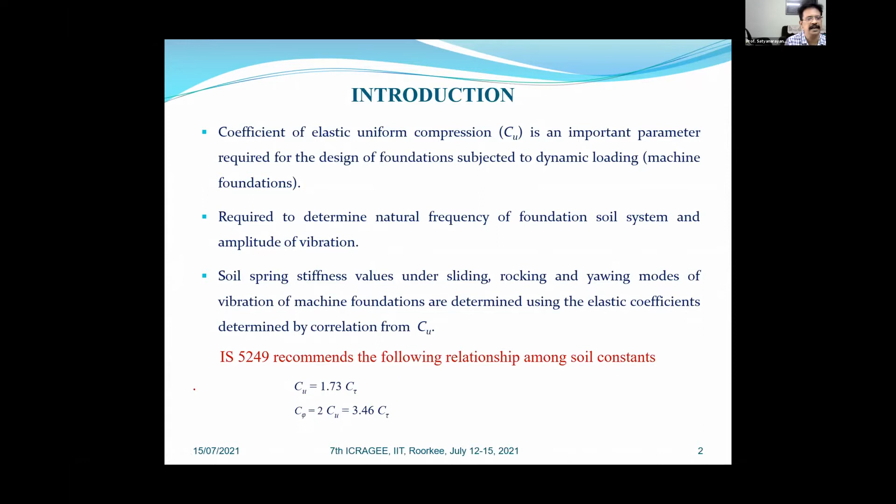So all these other three elastic coefficients are generally estimated by correlation from CU. For that, even our IS code 5249 gives a relationship. Once you know the value of CU, you can estimate the others, and from there you can find out the soil spring stiffness, and analyze the natural frequency of a foundation soil system for that particular mode,

and go for estimation of amplitudes of vibration. We can carry out design such that the calculated amplitude of vibration is well within the permissible limits. So as we know, coefficient of elastic uniform compression is defined as the ratio of uniform compressive pressure

transmitted from the base of the footing to the elastic settlement. Simply we say it as P by Se, right? This is generally determined either from a cyclic plate load test, or you can also do a block vibration test. But very often people prefer the cyclic plate load test because the equipment is readily available and it is easy to

perform the test, and the test is generally done using square plates. So sometimes in an industrial establishment, all the vibrating bases may not have foundations that are square in shape. There can be circular bases also. So in such a case, what happens is whatever estimate of CU is made based on square plate cyclic load tests,

when they are correlated using Barkan's well-established equation, Cu1 by Cu2 is equal to square root of A2 by A1, such correlation will be useful only for that particular shaped foundation. So in case you are determining CU from a square plate test and using the projected value for a circular based one, it may result in some error in calculation of amplitude of vibration and natural frequencies.

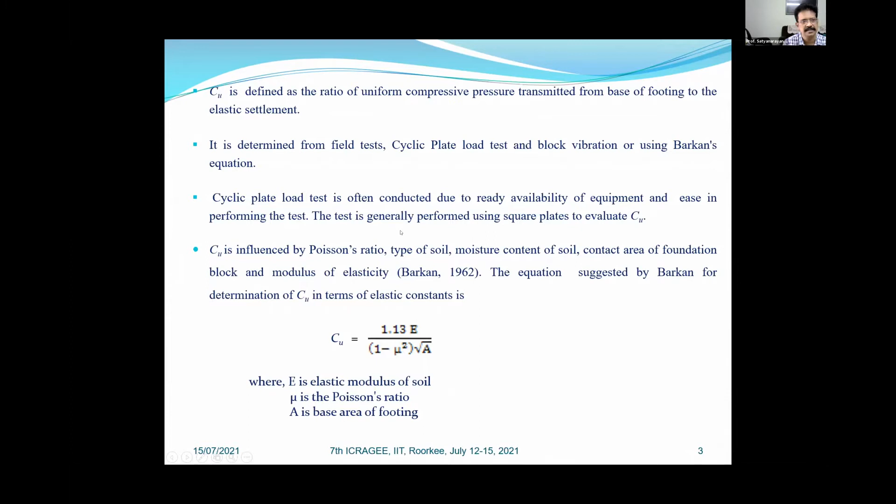needs precise testing in laboratory, and that's why the more common test done is the cyclic plate load test. So as for the value of Cu,

looking at its definition itself, P by Se, under a given pressure, the elastic settlement is definitely influenced by shape of footing because of the pressure bulb. The shape of pressure bulb for square footing and circular footing is different. So for a given pressure, we are not going to have the same elastic settlement in a given soil, and hence Cu is going to be affected.

So there is a need for evaluating a shape factor so that we can switch from values of Cu determined for square test plates or square foundations to circular foundations.

Also, industrial establishments generally take place in the suburbs of cities or metropolitan areas, where you may have low-lying areas, and a lot of filling will be done there. So generally, conventional fill materials are used and compacted in layers, but due to increased demand and scarcity of conventional fill materials, people are planning to use alternate marginal soil, particularly in coastal areas.

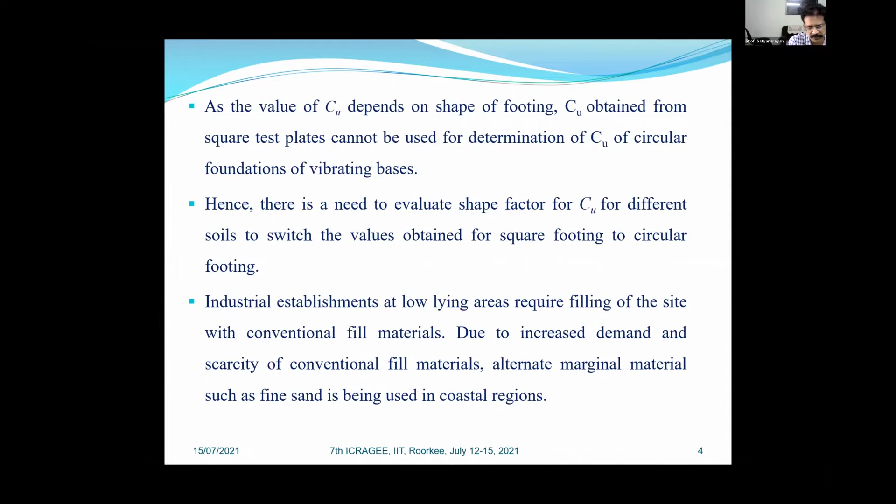Fine sand is predominant there, so efforts are being put to improve its properties, particularly to make it more resistant to possible liquefaction under saturated state. It is being stabilized by adding synthetic fibers.

So in the present study, an attempt is also made to evaluate the effect of shape of footing on Cu of fiber reinforced fine sand.

Polypropylene fiber is used in small scale cyclic tests, because if at a site the prevailing soil is saturated clay, it is always practice to replace such saturated clayey soil with a granular fill. So if we are going for usage of fiber reinforced fine sand, we should also have knowledge on how Cu changes and what the shape effects on Cu are.

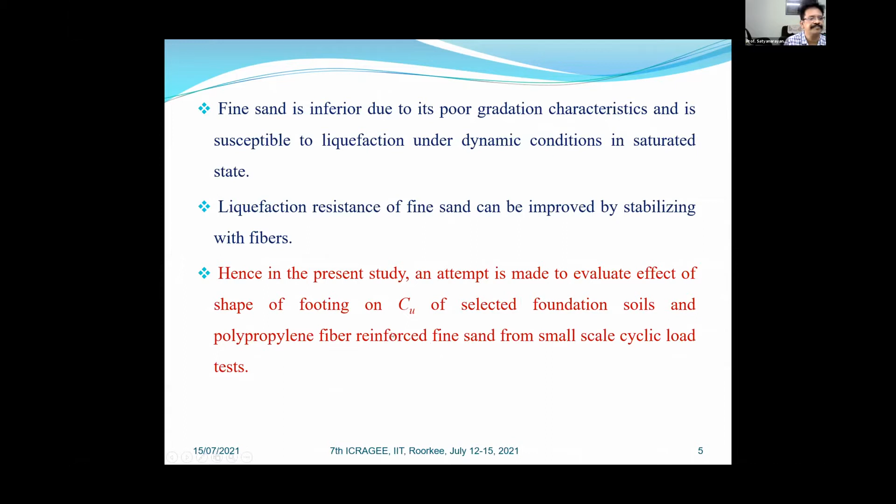So the present lecture addresses all these issues.

So as all of you know, the bearing capacity expression given by Hansen and adopted by our IS code — the net ultimate bearing capacity expression has factors including the effect of shape of foundation.

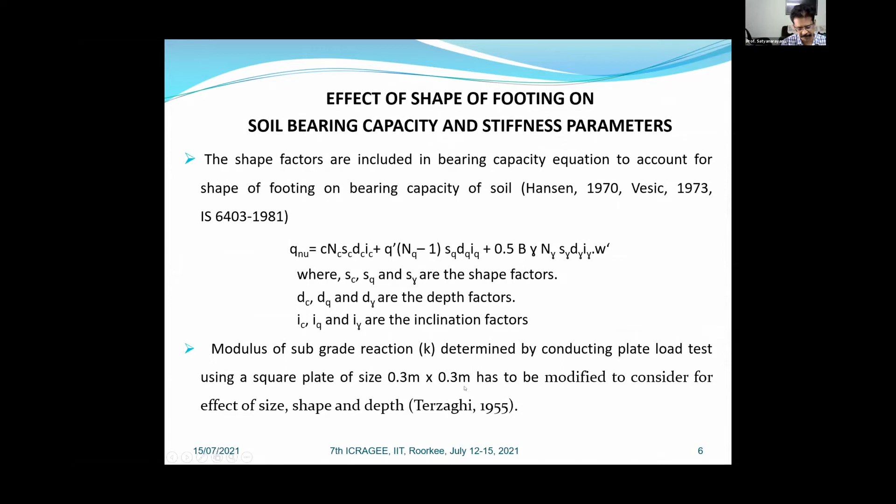Similarly, modulus of subgrade reaction, which we determine from plate load test, we correct for size, shape, and depth. Similar to that, our Cu is also a stiffness-indicating parameter, and the influence of shape needs to be accounted for.

So in the present study, we have studied the variation of Cu for square shaped test plates and circular shaped test plates in 3 different soils, namely fine sand, clay of low compressibility, and clayey sand. They are procured from sites within the Visakhapatnam city limits.

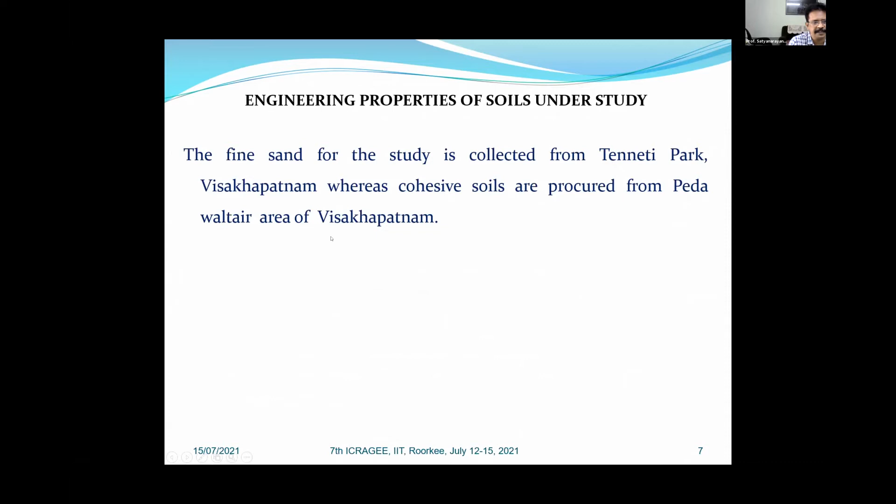Sand is collected from the beach, Tenneti Park area, and the other soils are procured from locations in the Peda Waltair area, which is closer to Andhra University.

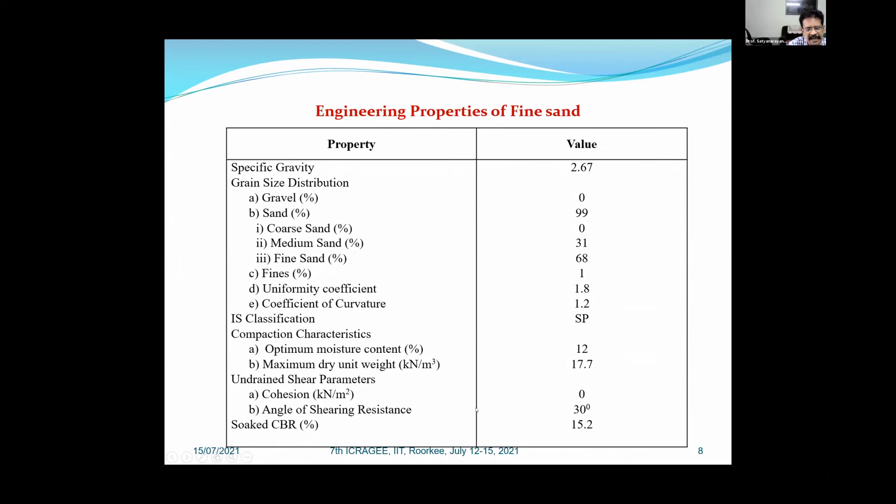Under heavy compaction conditions, the optimum moisture content was obtained as 12% with maximum dry unit weight of 17.7 kN per meter cube, and it had an angle of shearing resistance of 30 degrees when tested in direct shear apparatus. CBR value, though determined, is not related to our present study, so I'm not mentioning it here.

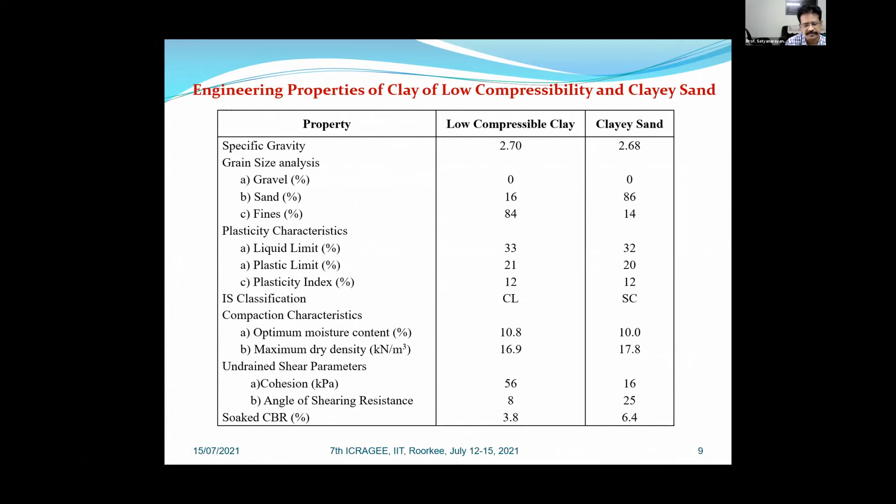Coming to clayey sand, it has fines of 14%, liquid limit 32, plastic, and undrained cohesion of 16 kilopascals and angle of shear resistance of 25. So these three soils are chosen for determination of coefficient of elastic uniform compression with respect to square and circular shaped test plates.

As doing plate load test is laborious and time-taking, we have made an attempt to do small scale cyclic load tests similar to cyclic plate load test in the laboratory using the loading frame, using the CBR plunger of diameter 5 centimeter, and using a square plunger made with MS plate, having the size same as that of CBR plunger, 5 centimeter only. Only thing is CBR plunger is circular, the fabricated one is of square cross section.

The foundation soil specimens out of the selected soils were prepared by compaction at OMCs and respective MDDs in CBR mold, and they have been soaked for 96 hours to ensure that it is completely saturated. In case of sand, though it is not required, as per practice we have done it, but for cohesive soils, 4 days soaking is mandatory to ensure that soil is completely saturated.

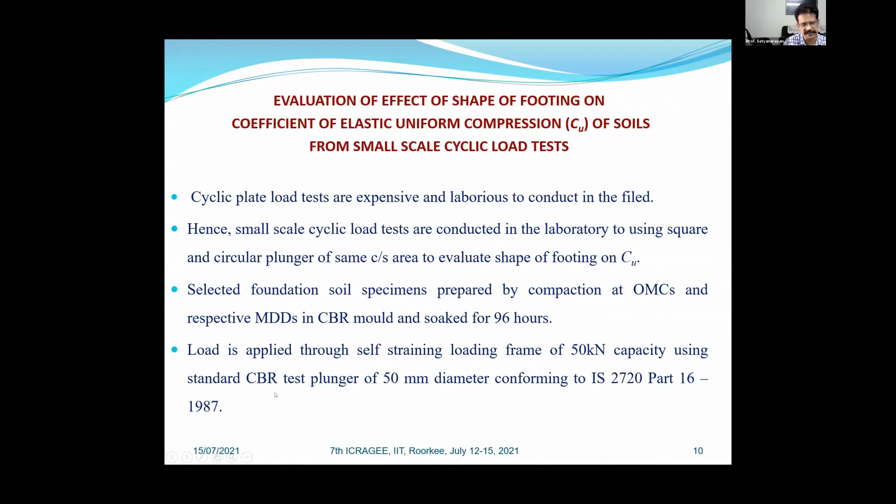So the load test is done in 50 kilonewton self-straining loading frame, first with usage of standard CBR test plunger. So this is the one. The load is applied on the specimen.

The load applied on specimen due to movement of loading platform in upward direction, making the specimen compress between the proving ring and upward moving platform, is measured with the help of a proving ring. A surcharge plate of 5 kg is placed at the specimen surface, particularly in fine sand. Unless we confine it, its response we cannot properly get. Not only that, during soaking, unless there is some surcharge, there will be loosening of soil right near the surface. For that, a uniform surcharge load of 5 kg is used.

Prior to actual loading, a seating load of 7 kilonewton per meter square is applied, and then the load is applied in increments of 1/10 of selected test load. The selected test load is 200 kN per meter square and 150 kN per meter square, respectively in fine sand and cohesive soils, because these values we can take from any codes or any literature. Presumptive bearing capacity values only are taken. Here our intention is to study the elastic response of soil, so that's why pressures of the order of expected bearing capacity in such soils is taken.

At each stage of loading, unloading is done and the soil is allowed to rebound, having the dial gauge readings initial at the end of application of loading and unloading. With the help of the dial gauge readings, the gross settlement and the net settlements are worked out. The difference of gross and net settlements will give us the elastic settlement.

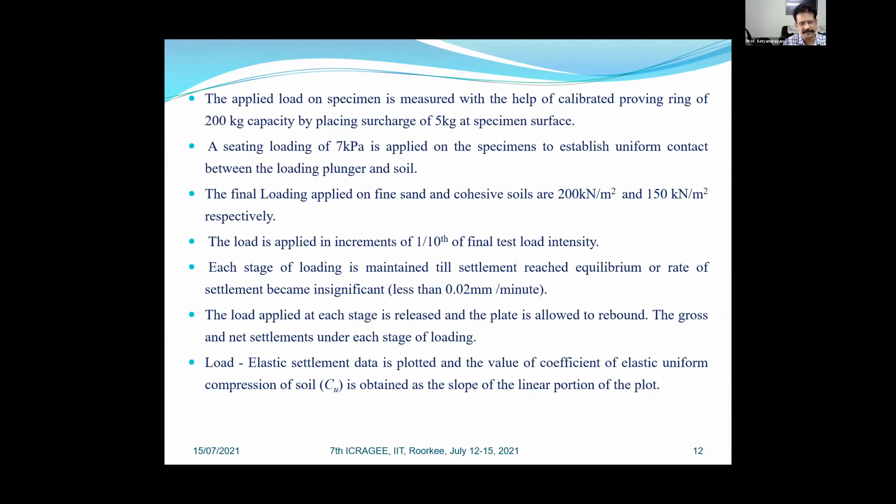A plot is made between the applied load intensity and elastic settlement. From the plots of load versus elastic settlement, Cu is determined as the slope of the linear portion of the plot. So these are the loading plungers used. Though the name plunger is used here, they are not to penetrate because the intensity of load applied is small, so we are not causing any shear failure during the loading.

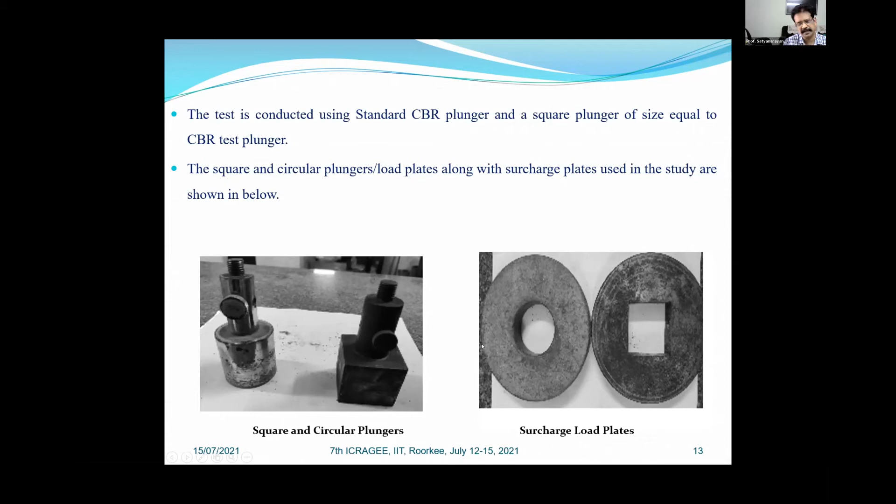Surcharge plates, this is available with standard CBR equipment. This is the fabricated one.

Synthetic fibers used are of polypropylene origin, procured from Recron. 6 mm and 12 mm length fibers are used while reinforcing fine sand with fibers. All the properties reported here are adapted from the manufacturer sheet.

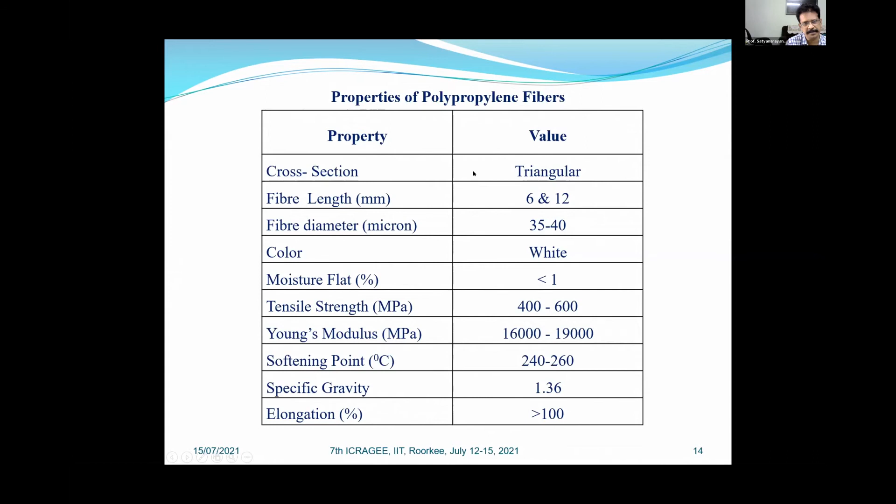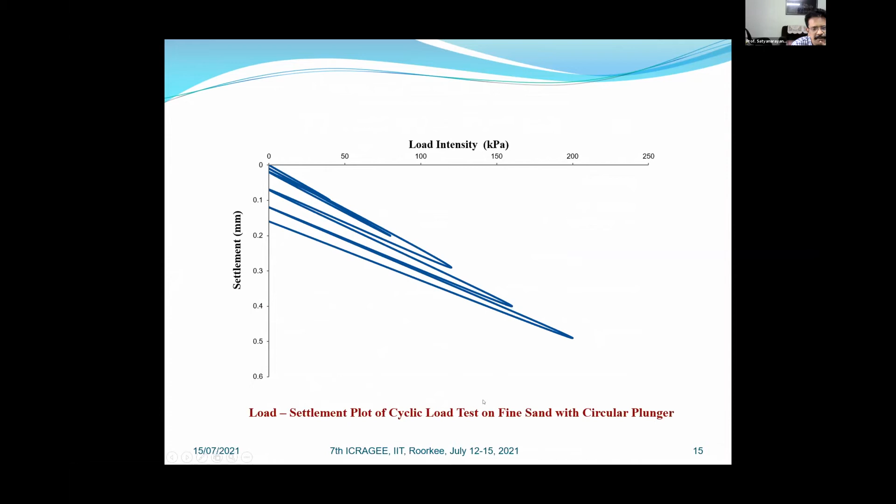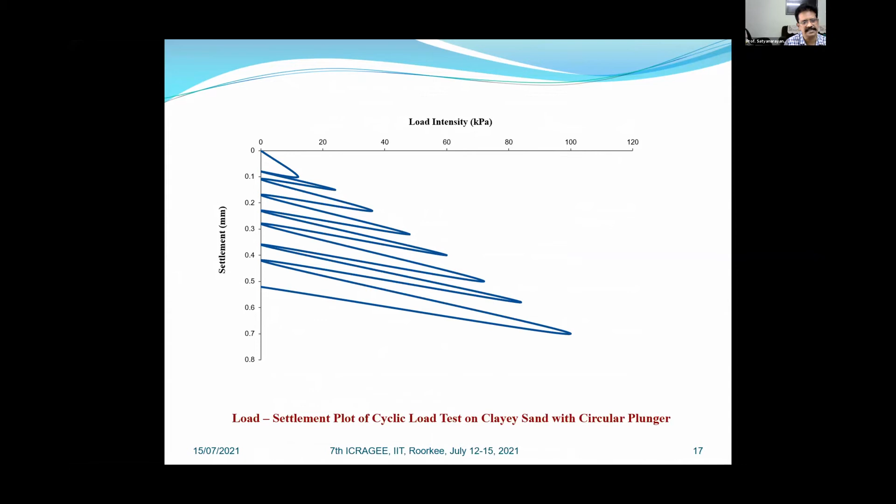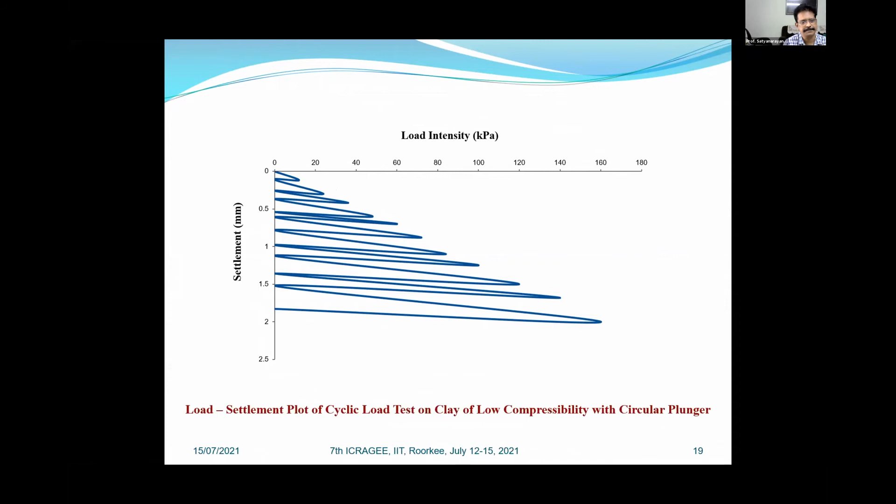From this, as I said, plots are made between applied load intensity and elastic settlement. Since the intensity of loading selected is of the order of presumptive bearing capacities, the best fit is observed to pass through all the points, and the plot is observed to be almost linear.

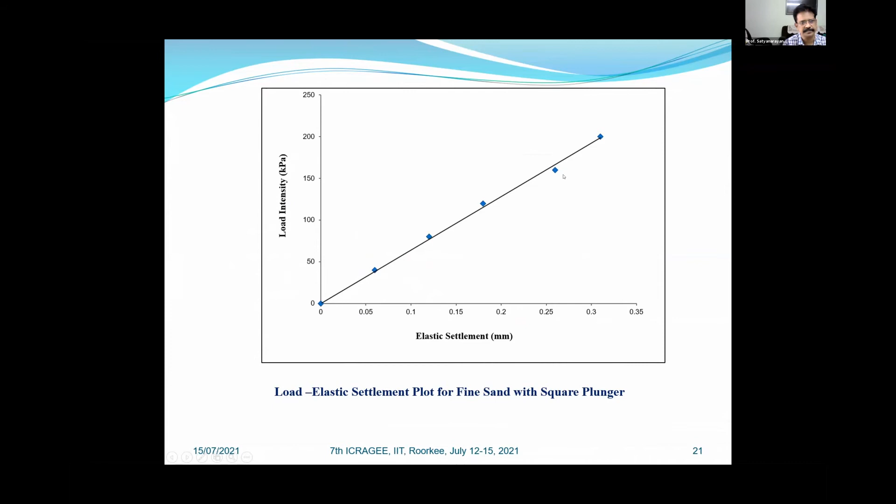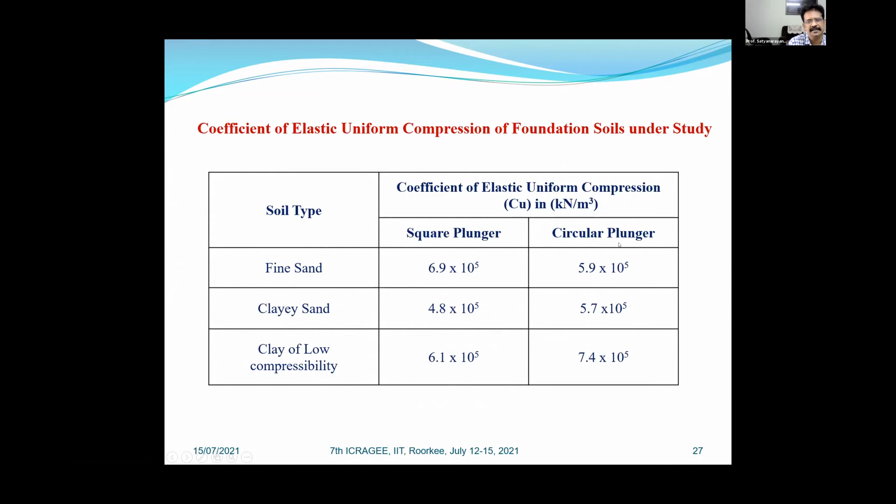Using the best fit lines and taking the slope, the values of Cu are worked out in the soils under study, namely fine sand, clayey sand, and clay of low compressibility. You can see that in fine sand, the value of Cu with respect to circular plate is smaller compared to square plunger, whereas in cohesive soils, that is clayey sand and CL type soil, for circular plunger, Cu value is more compared to square plunger.

If you take the ratio of values of Cu with respect to circular plunger and square plunger, the ratio is about 0.85 times. The reason for lower value of Cu for circular loading plunger is...

We know that the elastic modulus of sand underlying square loading plate will be higher compared to circular footing because the base area is more. So more frictional resistance will be mobilized between base of the loading plate and underlying soil, and more restrainment will be there to particles under load application. Because of that, there is lesser value for Cu with respect to circular shaped loading plunger.

Coming to cohesive soils, as we know, even if you look in terms of bearing capacity also, irrespective of shape of the foundation, the bearing capacity of soil is same.

So for a given pressure P, if you look at the volume of soil contributing to settlement, in case of cohesive soils, more soil will be falling within the pressure bulb corresponding to square plate. That's why in the denominator, settlement is going to be more for cohesive soils receiving load through square plunger or test plate, and hence they will have lower value of Cu.

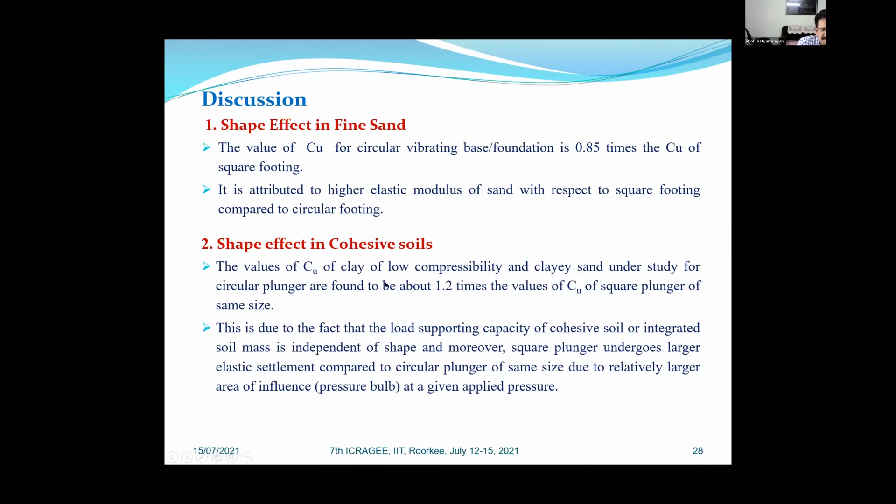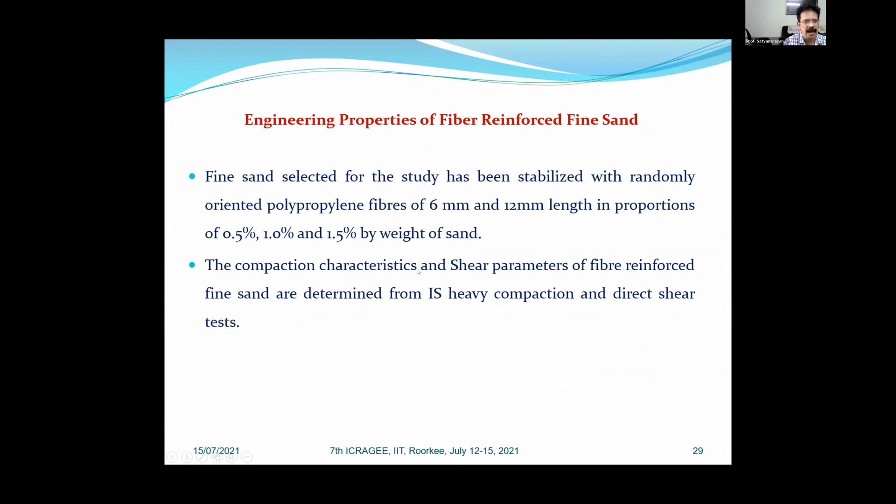After this, the study is extended to evaluate the effect of addition of polypropylene fiber of 6 mm and 12 mm length in various proportions of 0.5%, 1%, or 1.5% by weight of sand, and to arrive at the optimum percentage of fiber.

Direct shear tests are performed to find where the angle of shear resistance is maximum. For conducting direct shear tests, we need to prepare specimens corresponding to OMC-MDD condition, so heavy compaction tests are performed.

You can see with regard to a given length of fiber, as percentage fiber content increased, OMC values increased gradually and MDD values decreased. Same is the case with the 12 mm fiber length also.

You can observe that a slightly higher value of OMC is there for 12 mm fiber compared to 6 mm, and the values of MDD are slightly higher compared to the values achieved for 6 mm fiber.

The reasoning for this trend: lesser OMC requirement for 6 mm fiber is because of its short length, so they get easily dispersed in soil, giving ease in compaction, and you can reach maximum density with respect to that particular fiber.

Coming to 12 mm length fiber, they offer better restraining of particles, and whatever compaction energy is given will be much more effective, resulting in better packing of particles.

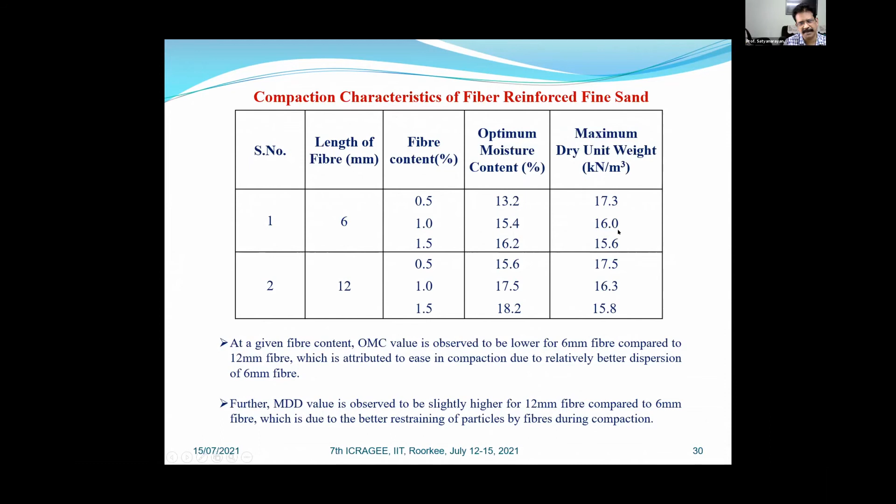Though the values are nearer, a marginal increase is there, which we can attribute to the restraining effect of 12 mm fiber because of its higher aspect ratio compared to 6 mm.

Looking at this table, for both 6 mm and 12 mm length fiber reinforced fine sand, the angle of shear resistance is highest at 1%, and hence the optimum fiber content is observed to be 1%. Even in literature, people reported optimum percentage for stabilizing sands of the order of 1 to 1.5% by weight.

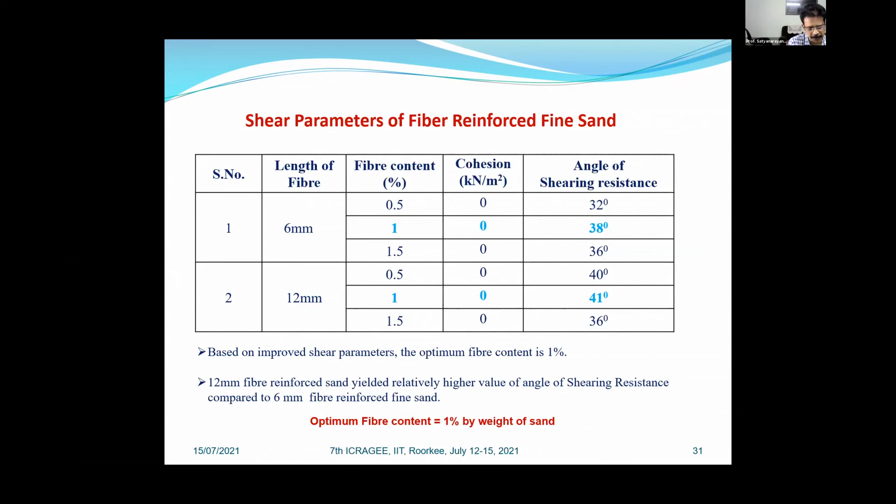So small scale cyclic load tests are performed on fiber reinforced soils using 6 mm and 12 mm length fiber for both square and circular plungers.

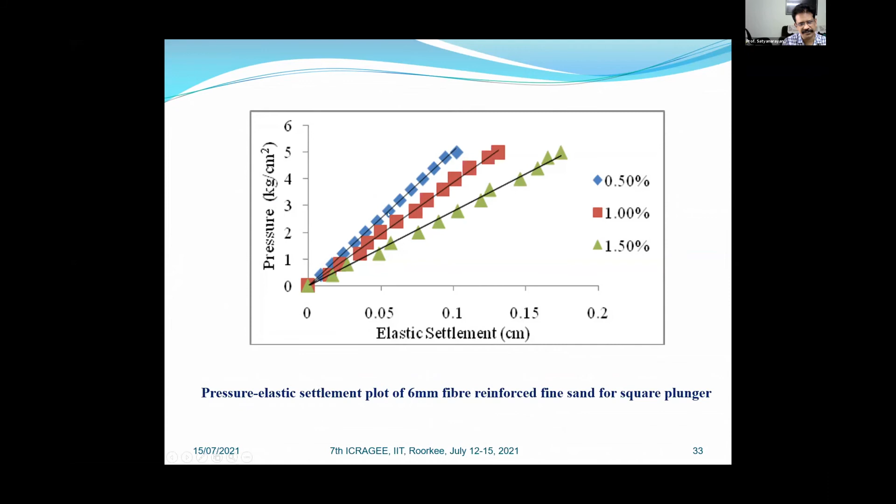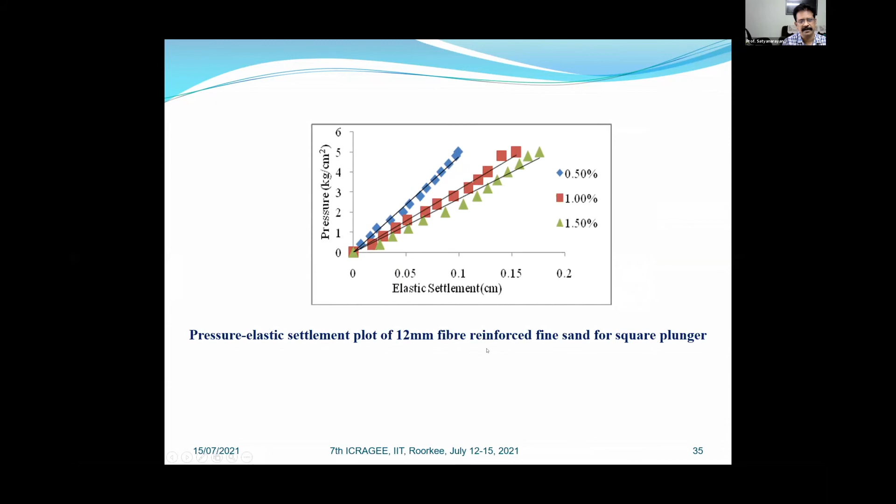As the percentage of fiber added to soil increased, the slope of pressure versus elastic settlement decreased, and the value of Cu is decreasing with increase in fiber content. You can see the same trend with circular plunger, and coming to 12 mm fiber reinforced fine sand, also the same trend.

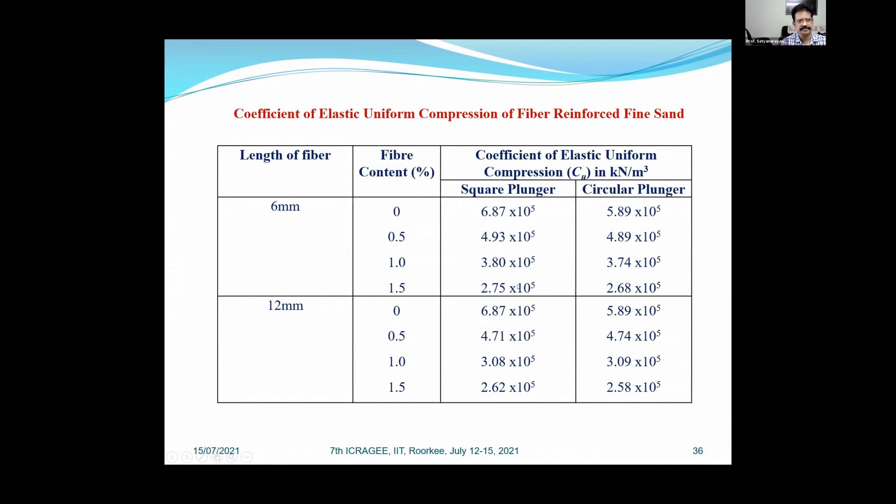One more thing I have mentioned is the values of Cu are decreasing with increase in fiber content, irrespective of shape of plunger and fiber length. This we can attribute to increased elastic compression resulting from fiber replacement in fine sand. Compared to fine sand particles, polypropylene fiber is compressible.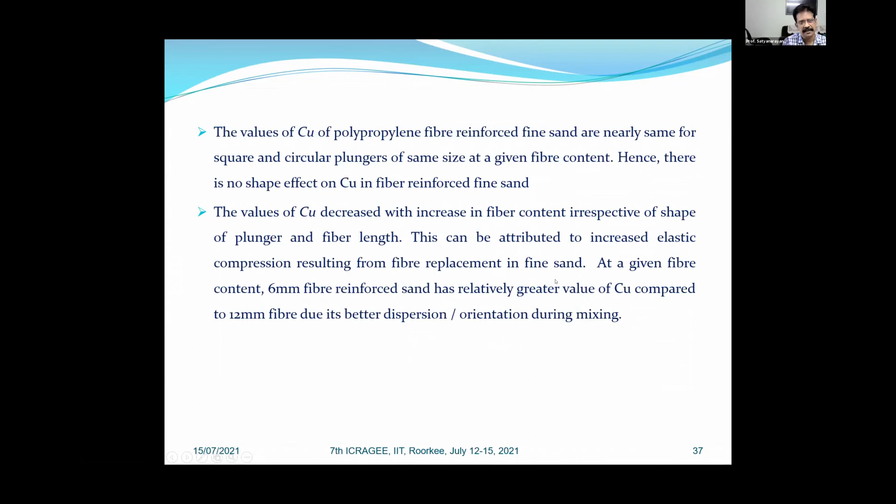Based on this study, the conclusions we can draw: the value of Cu for circular vibrating base or foundation can be taken as 0.85 times the value of Cu of square vibrating base or foundation. In case of cohesive soil, like clay of low compressibility and clayey sand, the shape factor to transform value of square footing to circular plate is 1.2.

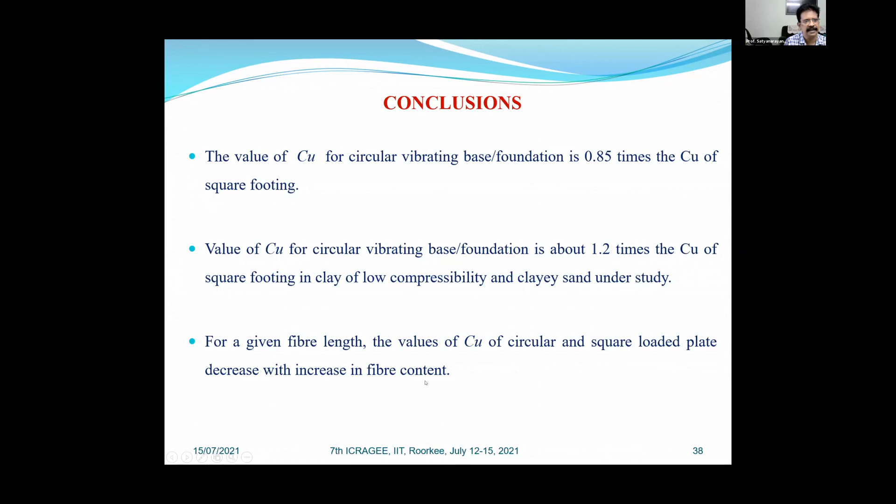And for a given fiber length, the values of Cu for square and circular loaded plate decrease with increase in fiber content. In case of fiber reinforced sand, there is no effect of shape, so whatever values we determine for square footing, we can use for circular footing.

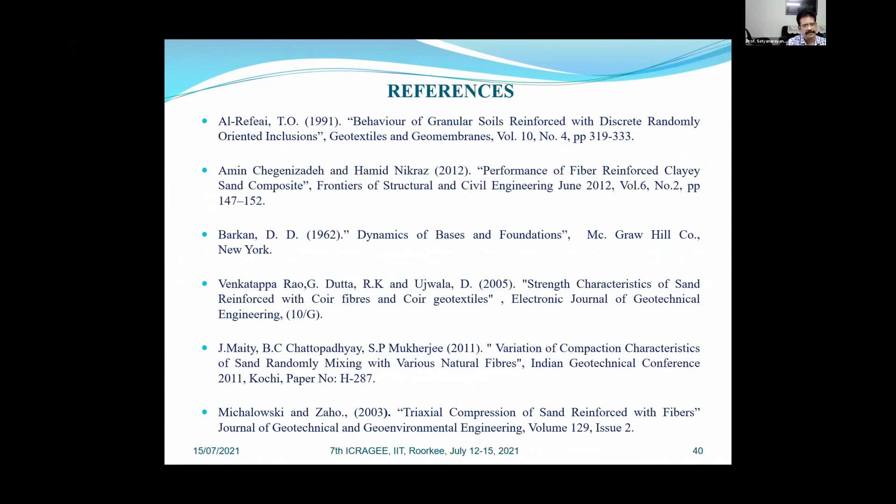At 1% fiber content, the values of Cu for 6 and 12 mm fiber are decreased by 40% and 58% respectively. These are some of the references, and based on this work we had two publications, one in our Indian Geotechnical Journal and other in International Journal of Geotechnical Engineering, published by SEAGS, Southeast Asian Geotechnical Society Journal.

I thank the organizing committee for giving me this wonderful opportunity to share some of our work related to coefficient of elastic uniform compression. Thank you.

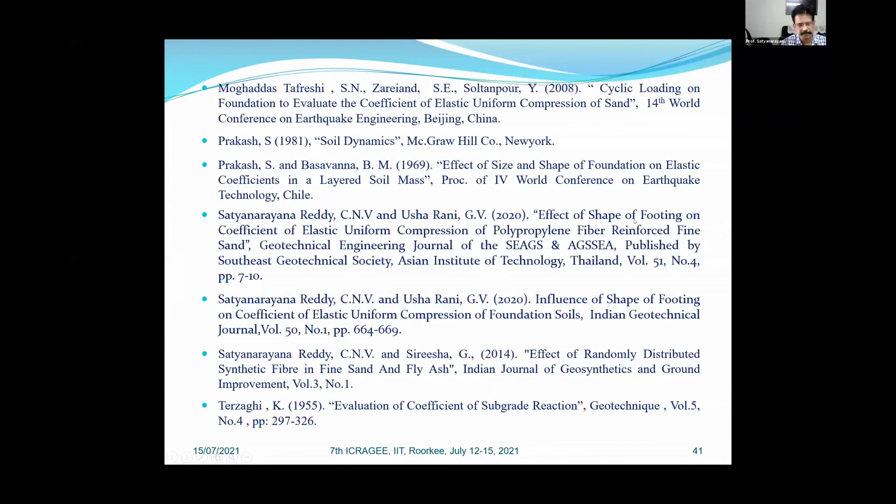Cu is decreasing. The last conclusion I have shown, I think. A presentation, shall I show that? Values of Cu for 6 mm and 12 mm decreased by 40% and 58%.

Cu here is for 6 mm and 12 mm fiber reinforced soil. If you look at the interaction of steel fiber with respect to concrete, their aspect ratio plays a vital role in terms of bond. But coming to sand grains, the synthetic fiber friction mobilization works in a slightly different manner. From the results, we have seen more reduction in value of Cu under cyclic loading for 12 mm fiber compared to 6 mm, because dispersion of fiber is better with 6 mm fiber. So it interacted in a better manner under cyclic loading, and that's why lesser reduction of Cu was observed.

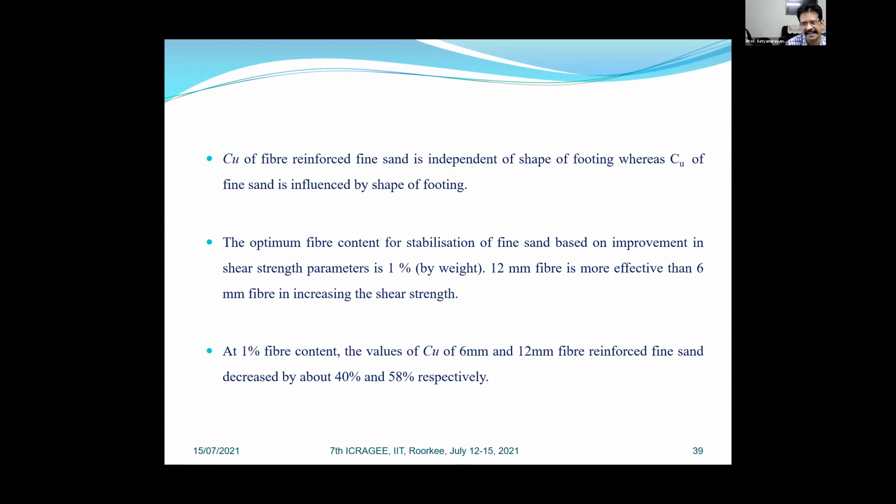Is there any effect of orientation of fiber? This is randomly oriented, sir, because we cannot keep fiber in a particular orientation, just like our reinforcing sheets, we cannot place it directionally. It is randomly distributed fiber reinforced sand.

One small question: any recommendations for field? Because when you apply this, I think you must have done this as lab test. When you apply this in field, how to do it practically, because the mixing of the fibers may not happen properly? And to what depth?

Just like our reinforced soil bed, we replace weak soil to a depth of about B to 1.25 B. So there we can replace clay soil with fiber reinforced sand, and we can achieve its benefits. Thank you very much for a very informative lecture.